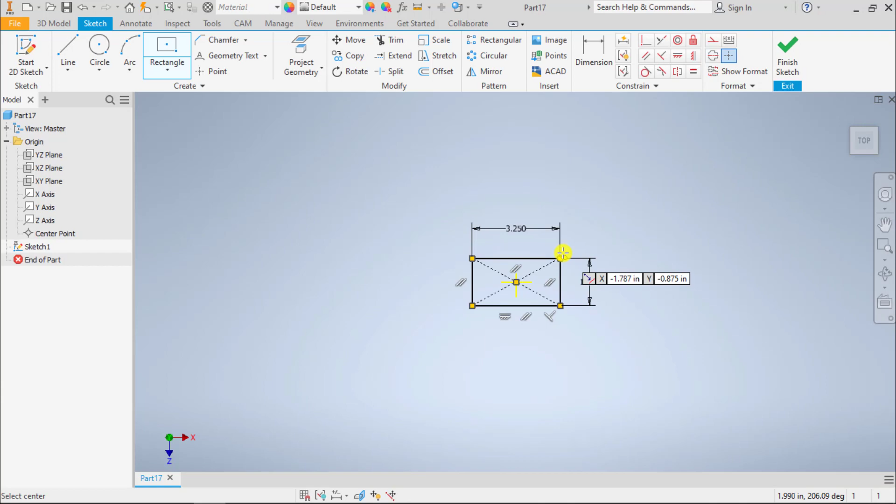So if we pop over to Inventor, I'm going to start a sketch on the top view. Make sure top reads correctly. Project all 3 planes. 1, 2, 3. And I'm going to throw a center point rectangle on my origin, 3.25 by 1.75. And that is 1/2 inch tall, we see right here. So we're going to finish sketch, and we're going to extrude this 0.5.

And now we're going to come to our next part, which is this here. So we could do this 2 ways. We could either draw this L shape and then extrude it, or we could draw a rectangle here, which would be the bottom here, and then we would extrude that up and then put an L over here. So let's go ahead and do it that way. So this rectangle is 3/4 from the end and 3/4 deep.

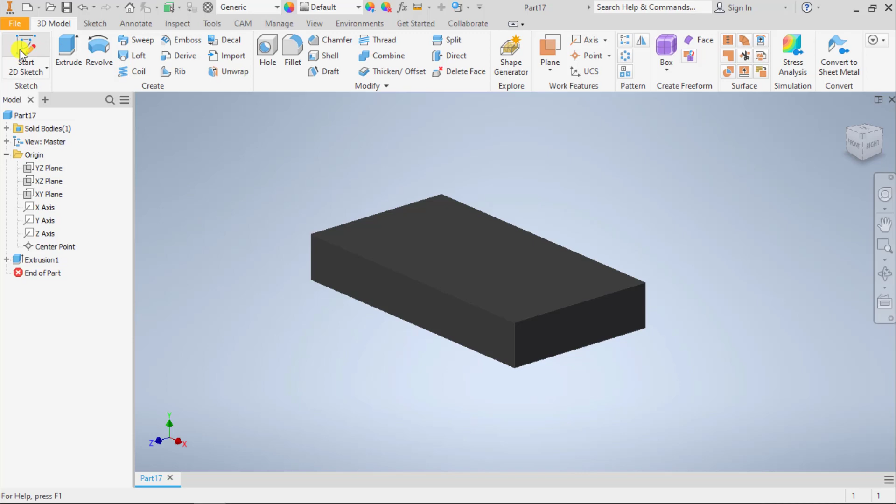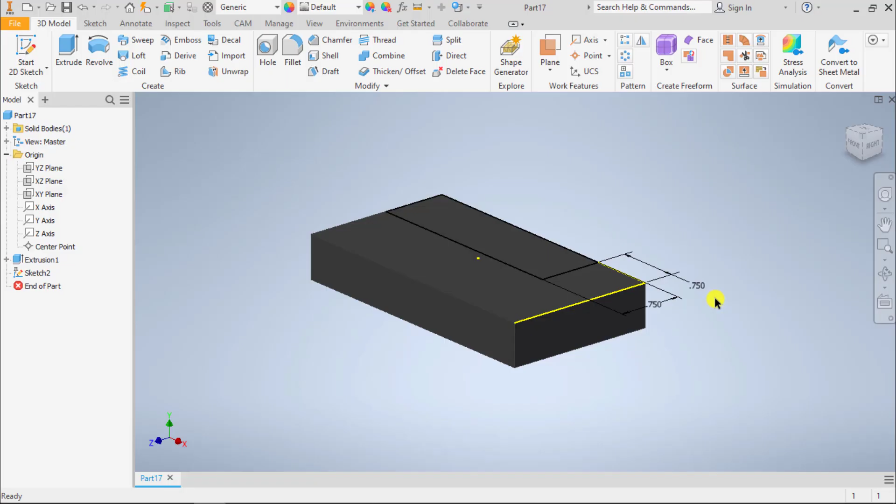So if we come back to Inventor and we sketch on the top, we'll put a 2-point rectangle in, and I'm now going to dimension it. I'm going to put a 3/4 inch dimension there and a 3/4 inch dimension there. Finish sketch, and that is a 1/2 inch tall. So we're going to extrude that up 0.5.

I'm noticing that the color of my model's darker than it has been. Not quite sure why that is. Interesting. Okay, well, let's go ahead and move along.

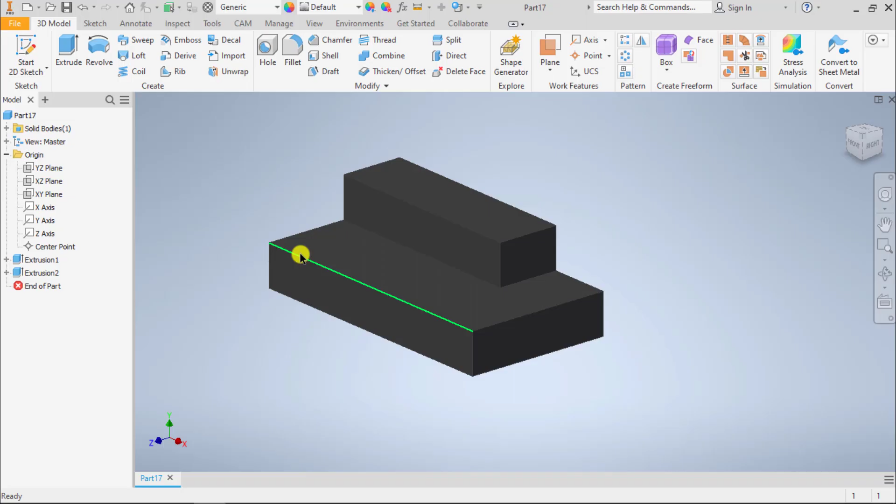Last step then is to draw this L shape. And out here, we don't have any planar face to sketch on. So what I'm going to do is I'm actually going to sketch on this face. But to make it easier on myself, I'm going to flip my model twice so that I'm now looking at the right side, because from here we're looking at it from the right side.

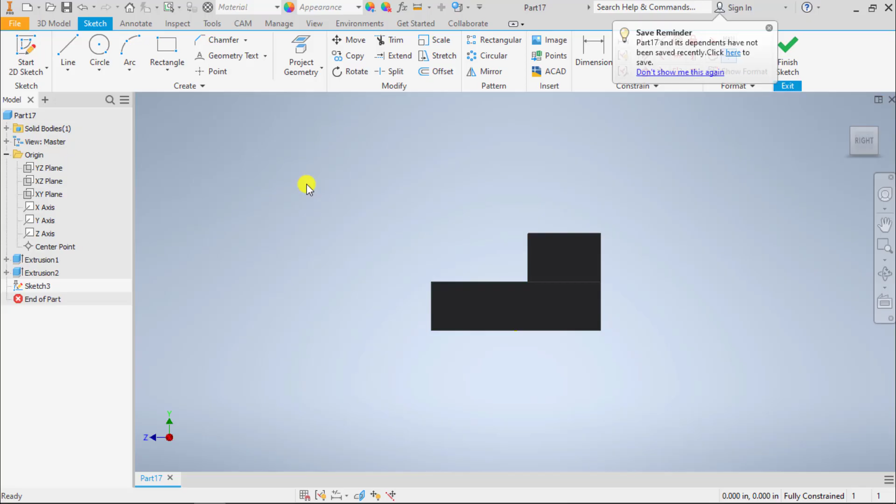So we see here that this is 3/4 by 1/2 inch deep here. And so what we're going to do is we're going to draw a line from here up 3/4, over 1.75, because this goes full height, or full depth, excuse me.

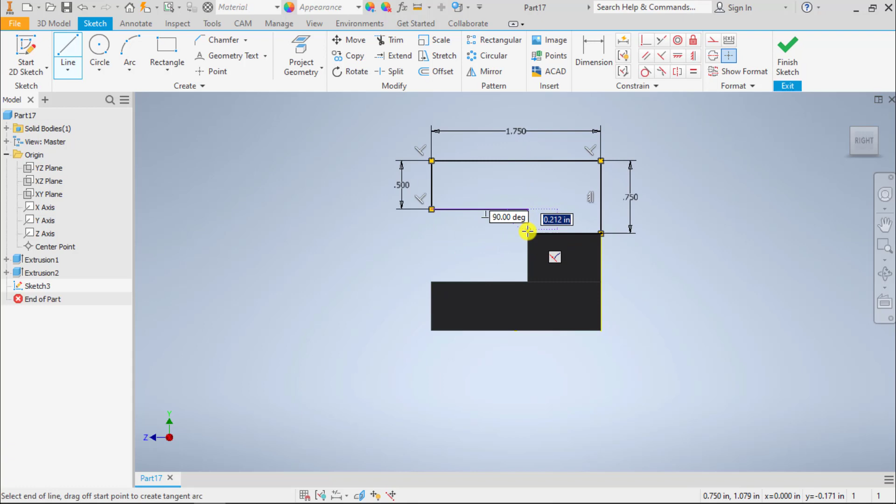And then we're going to come back to this corner here and make sure we close it at the bottom. If it's not closed, remember, it won't extrude. Now, when I hit my house button or finish my sketch here, we're going to see, hit my house, that indeed we are on the end, so we're going to extrude it this way, okay?

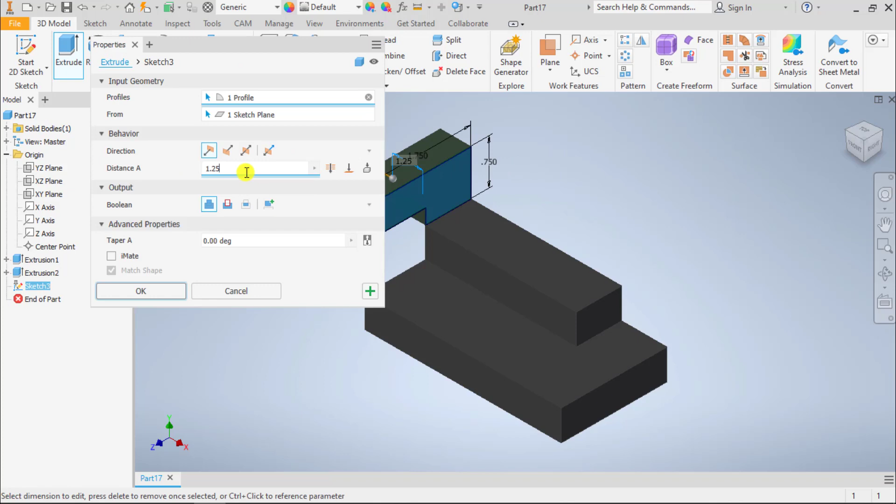And that dimension is 1 1/4. So we're going to go ahead and extrude this 1.25. Now if you'll notice, it's going the wrong direction. Easy change. We're going to flip the direction and hit OK. And there is our part. So what seemed to be a pretty complicated part, when it all got broken down, isn't really that complicated.

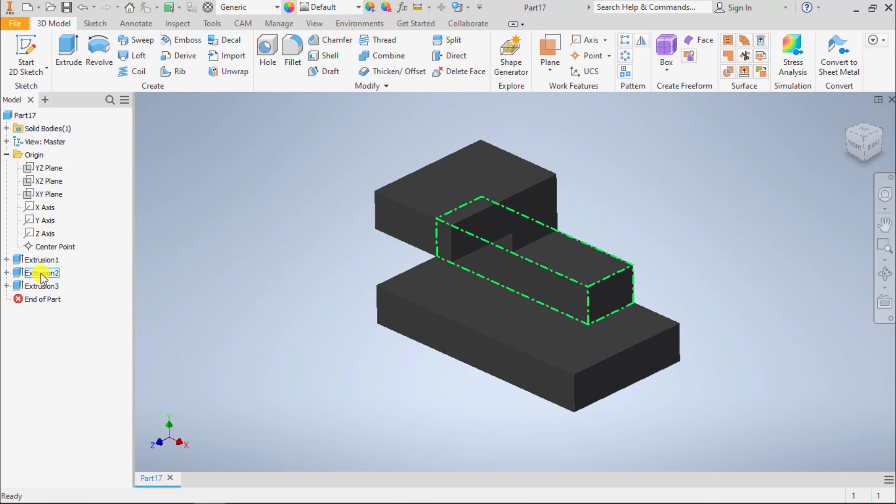Now if we're going to do this with material subtraction, I'm going to delete my other two features and change this extrusion to 1.75. And then the question is, how do we do this with subtraction? Well, first I need to cut out a rectangle through here that is going to be 1 inch by 3/4. This is 3/4 here. And this distance from here to here is 1 inch.

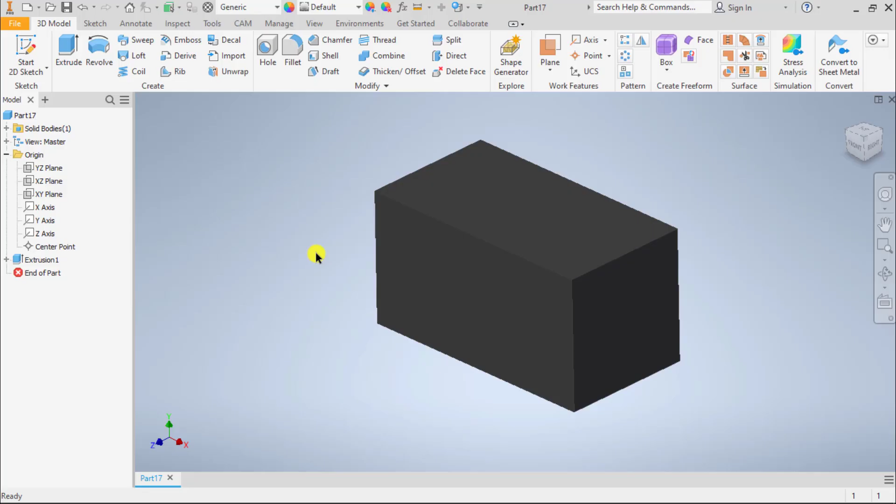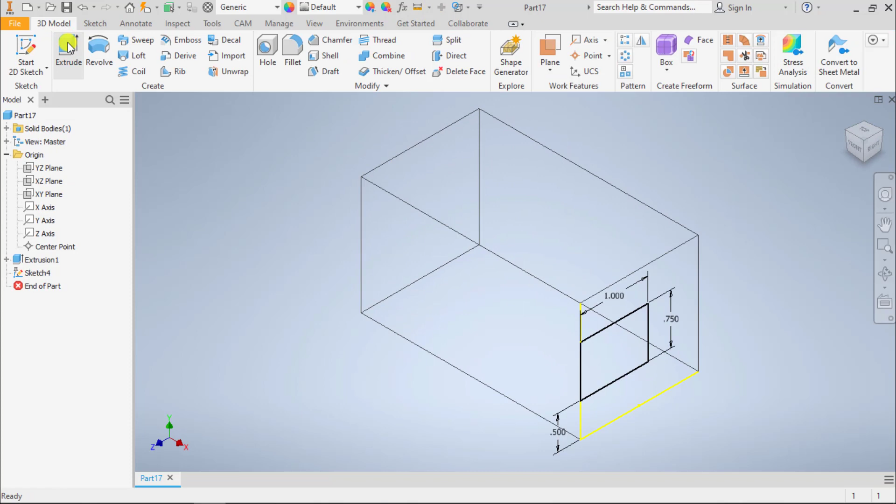So what I can do is sketch on the right side, put a rectangle in. I'm going to change my visibility to wireframe, and then we're going to go 1 inch, 0.75, and now this needs to be located 0.5 from the bottom. And then if we finish sketch and extrude that as a cut, and now here we can just say through all, and then that's done.

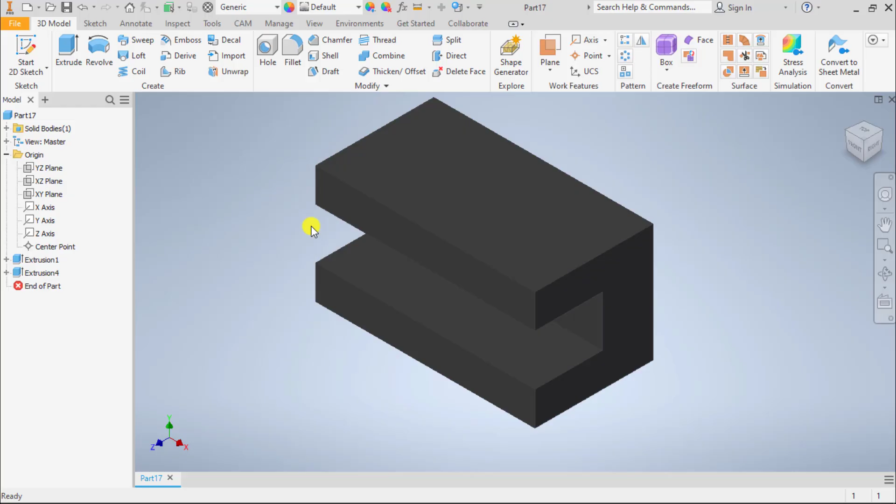So that looks good. And now what I need to do is draw in this shape here. So this is where it gets a little more complicated. What we're going to do is sketch on the front, and then we need to come from some point over here down 3/4.

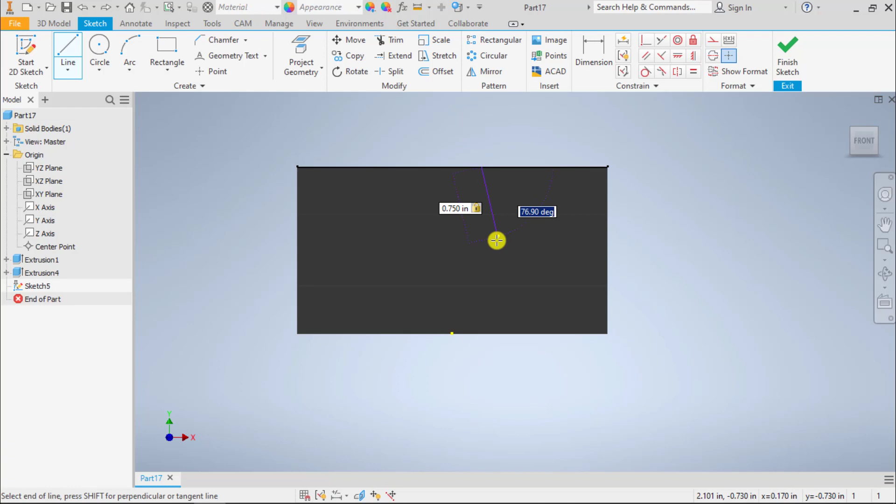Well, that's interesting. Inventor has a habit of doing this on some occasions, and I haven't figured out why. When I am moving my mouse in the correct direction, if I type in 0.75, it flipped it to 180. So I'm going to tab over and see if 90 will work. So just kind of pay attention to that. It's a little bit of a hiccup that it has developed for some odd reason. Then we're going to come over 1 1/4. Sorry for the flipping back and forth.

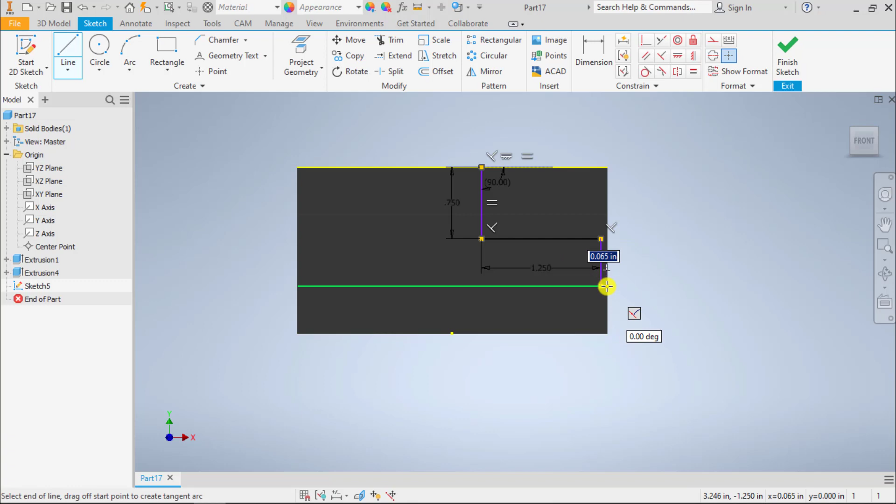And then down, and then over to close it. And then this dimension is 1.25. That's going to shift that whole thing over. So now I'm going to finish sketch and extrude that as a cut through all, hit OK, and notice we've got a little bit of a problem here.

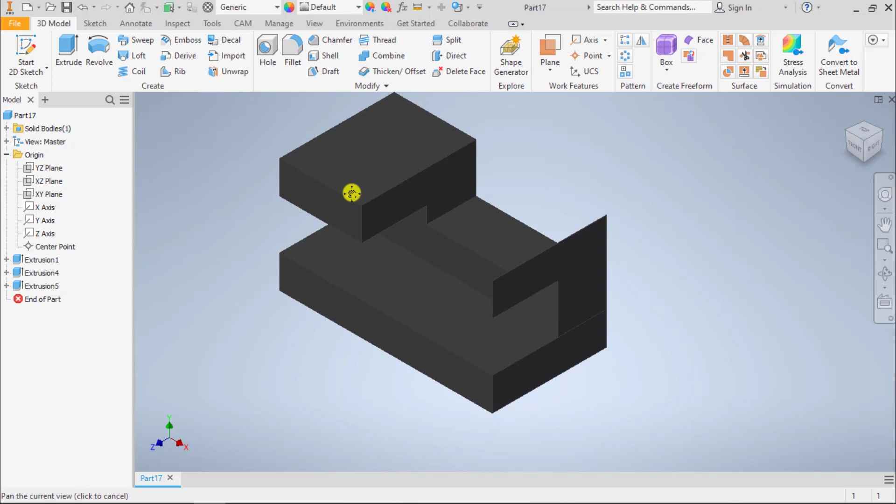Now this was not intentional, but sometimes this happens because that little line segment that I drew right down here was so short, it didn't quite go all the way to the end. So what I'm going to do is put a coincident constraint between this endpoint and this point, and now it shifted that line over, finish sketch, and there's our part.

So whether you want to do this with material addition or material subtraction, or try both, it's not going to matter as far as I'm concerned when I grade it. I just want to see the part is correct. So hopefully this helps when we have a little more complicated part to break it down, remembering those 3 questions that we ask ourselves at the beginning of each part.